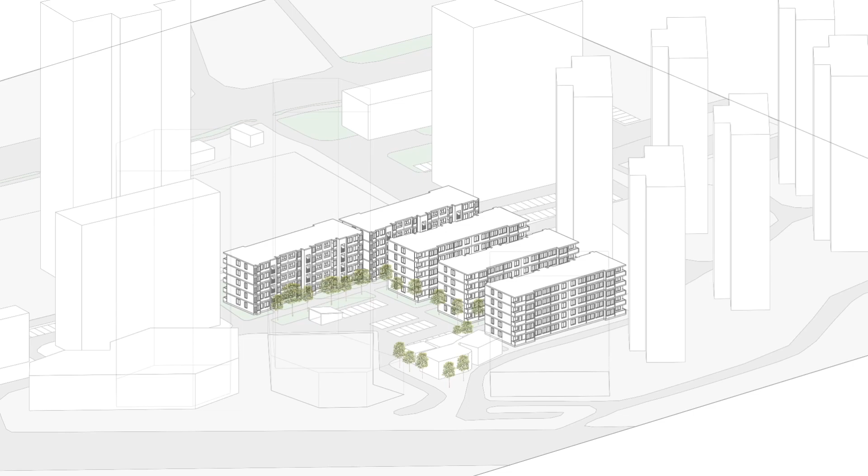This is a former colleagues community in Wuhan, China. Built as national property in the 1990s, it's been through the national privatizing housing reform, and the demographics have changed over time. The building blocks sit very close, and there is not much communal space.

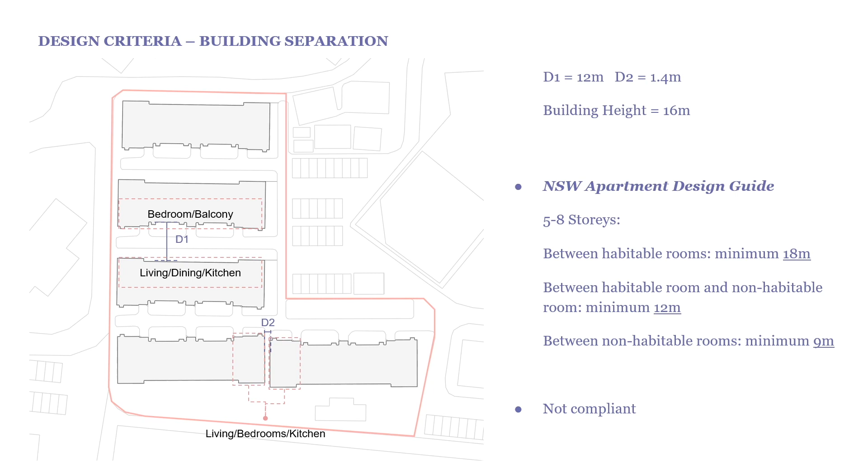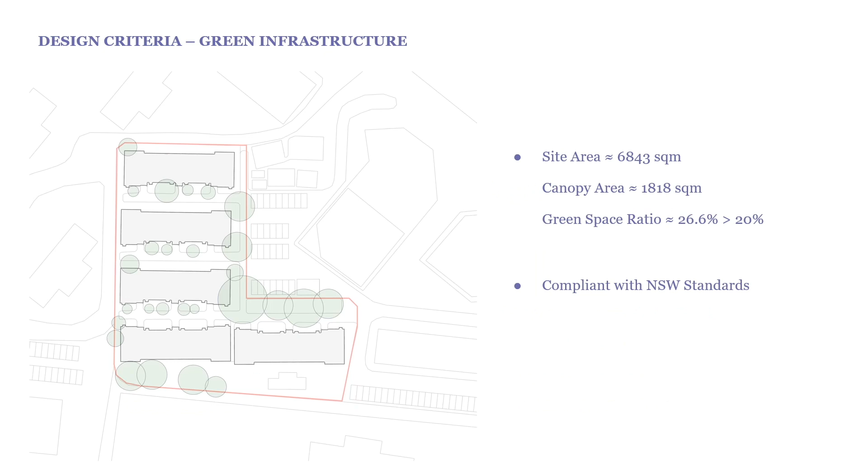It does not comply with either the New South Wales or Wuhan standards for building separation, especially for the two blocks sitting next to each other horizontally. For the green infrastructure and communal spaces, only the tree canopy target in New South Wales standards is reached.

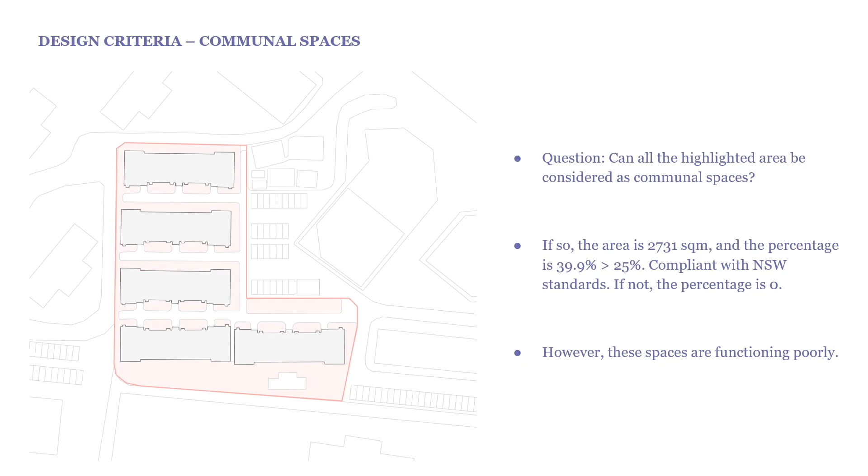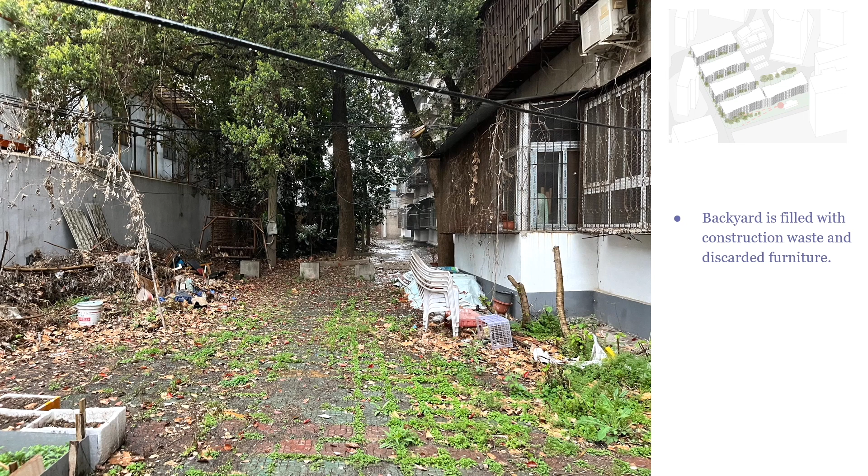Although the potential communal space is abundant, there are almost no facilities. Plus, the spaces are scattered around. They're functioning poorly as communal spaces. The backyard is filled with construction waste and discarded furniture. However, some residents have set up some small private farms and gardens.

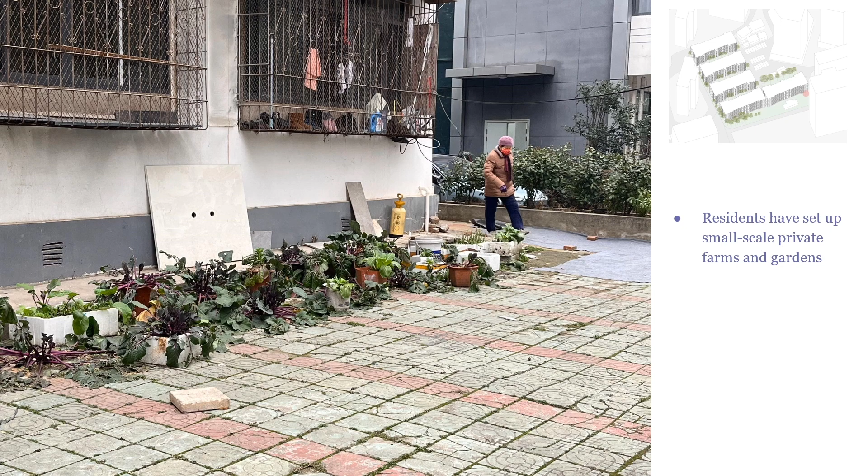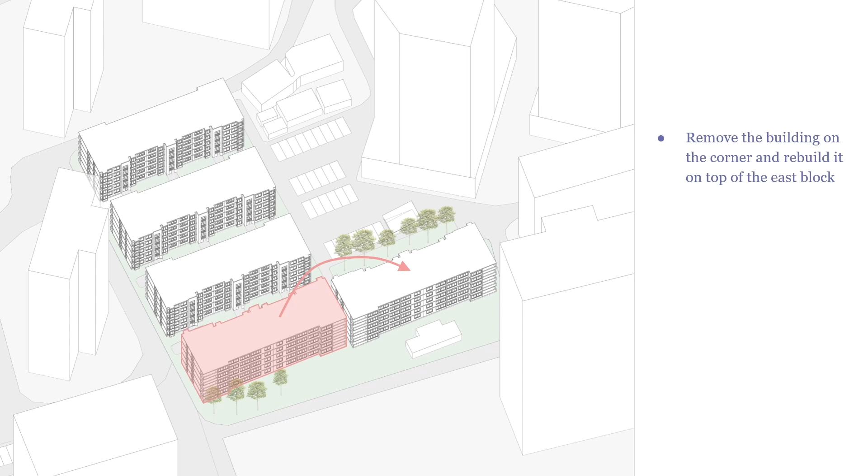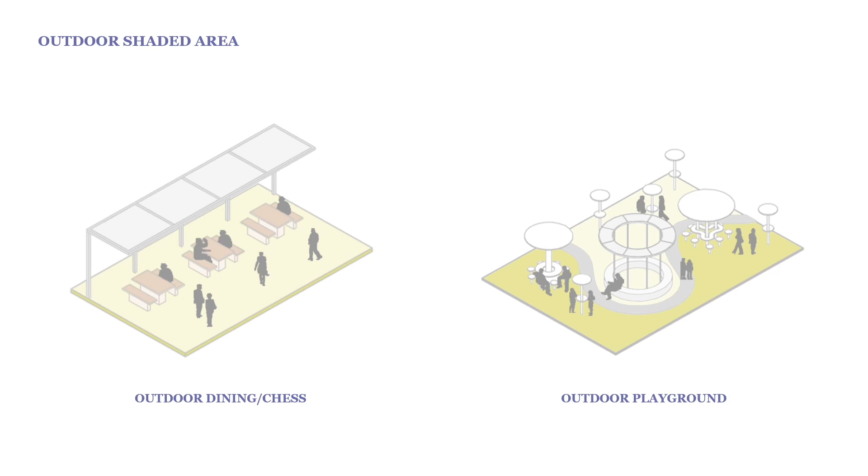In terms of the intervention, to incorporate the considerations above, the idea is to remove and rebuild the corner block on top of the east block. So there will be room for a central gathering communal space where various facilities can be introduced and shared.

With good communication with the residents beforehand, this method may be used for slab blocks or walk-ups to deal with high density and lack of ground floor communal spaces at the same time.

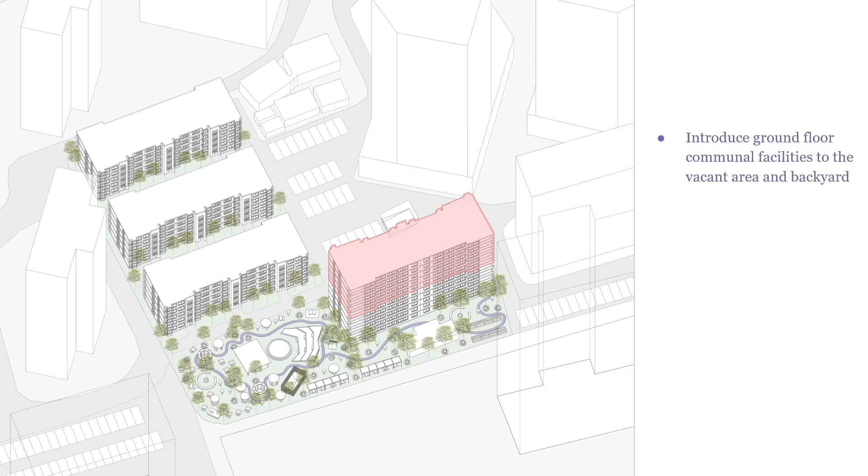The teachers' apartment tower was built in 1995, located in the Qiushi community in the central plot of Hangzhou City. Qiushi community was designed by Zhejiang University for the accommodation of teachers, staff, and their families. Qiushi community is a typical, highly aging community.

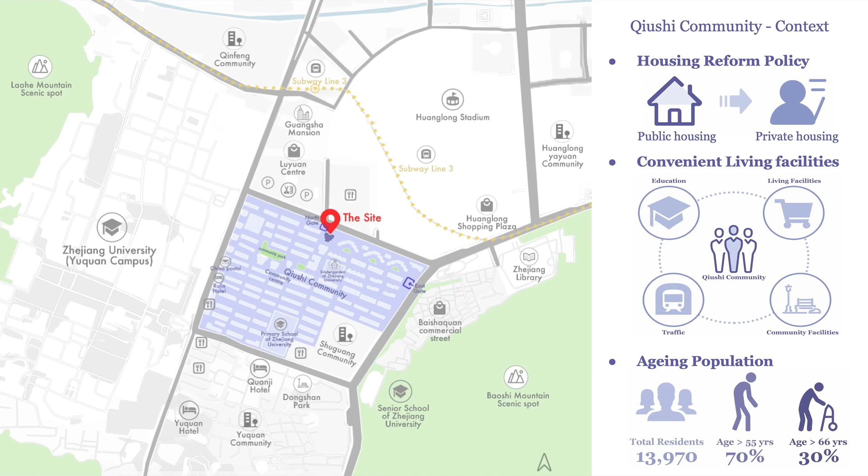There are many retired teachers and professors living in the community. Currently, there are many elderly living alone or living with their families. The typical floor plan shows each story has 8 flats, mainly 2-bedroom apartments.

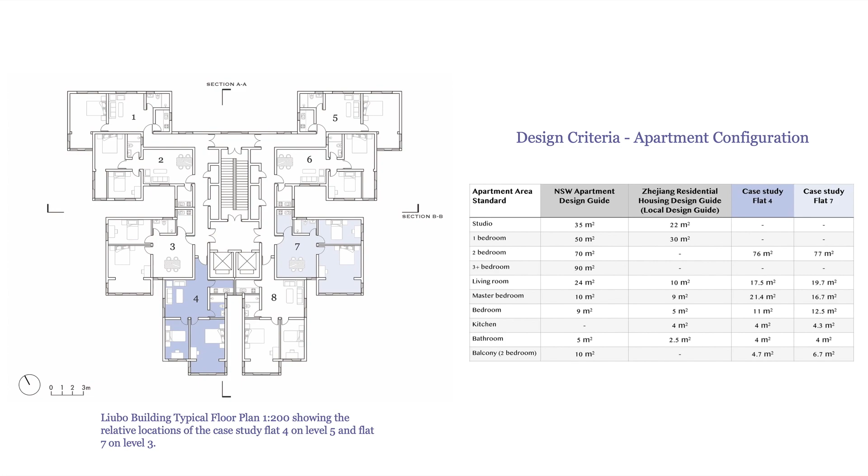The case study plan shows too many closed spaces, which reduce accessibility, and no total freedom of movement, such as a narrow kitchen, a washing machine installed in the bathroom, and a study desk and cabinet placed too close to the bed. There is no private open space. Residents have to dry clothes and grow plants outside the window.

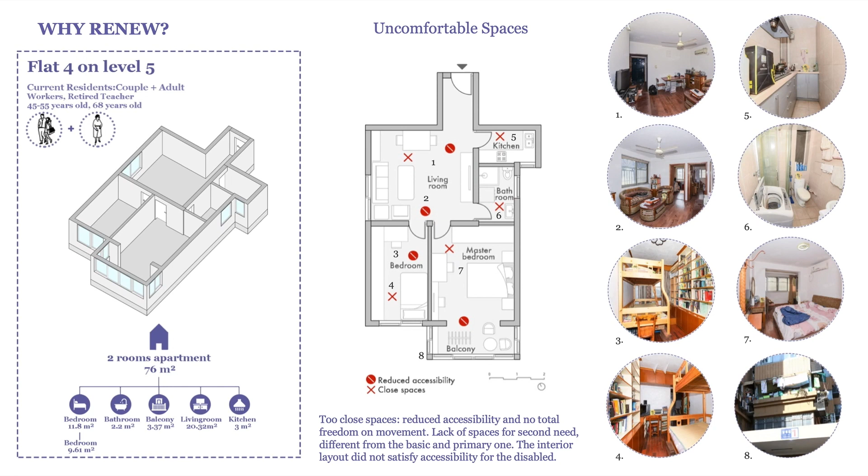The interior layout did not satisfy the current needs, and also lacks spaces for secondary needs. The Zhejiang Guide outlines the daylight factor requirements for specific rooms. The case study did not comply with the standards. The existing flat has poor daylight conditions and no external sun shading device.

The New South Wales and Zhejiang Guides both require that all habitable rooms allow natural ventilation. The New South Wales Guide specifies design criteria for cross ventilation, which the local guide didn't cover. The current apartment did not comply with the New South Wales Guide, with all rooms having single openings and no cross ventilation.

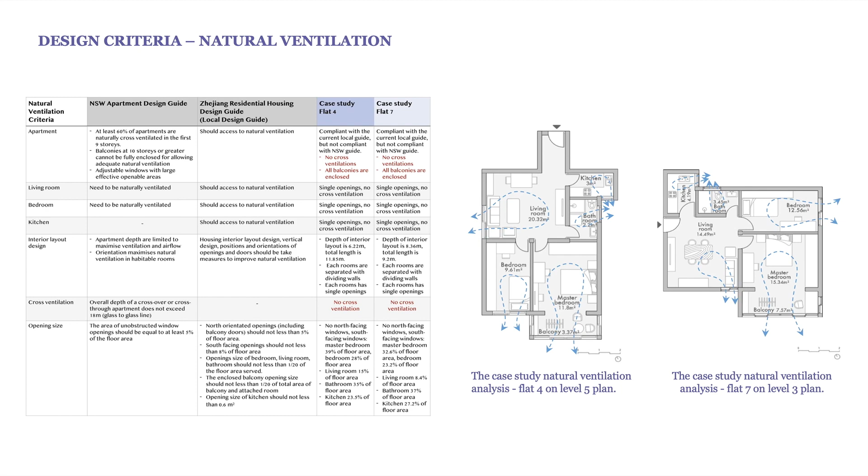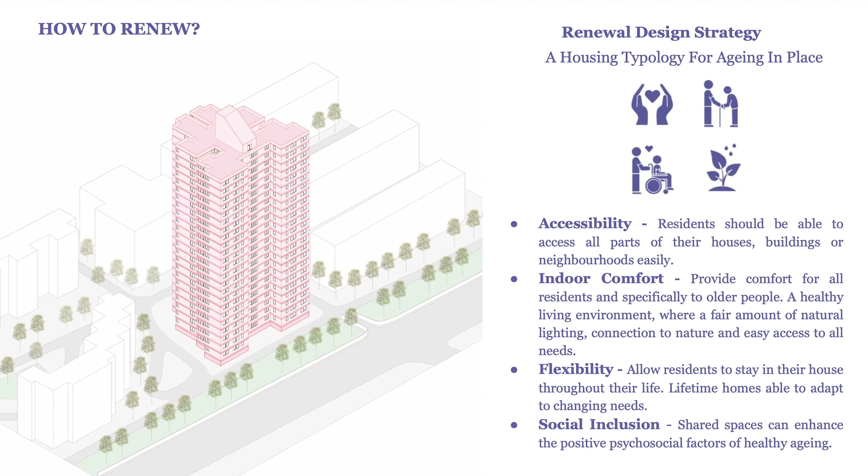The renewal design strategy addresses accessibility, indoor comfort, flexibility, and social inclusion. The renewal interior layout design is based on circulation access. Bedrooms are separated from the living area with a folding wall. At daytime, it can be fully opened, allowing cross ventilation and providing higher accessibility, especially for elderly and disabled people.

Bathroom and kitchen are separated by the corridor with a sliding wall for saving door space and allowing for cross ventilation. For flexibility, the walls became systems of furniture of different typologies based on different needs.

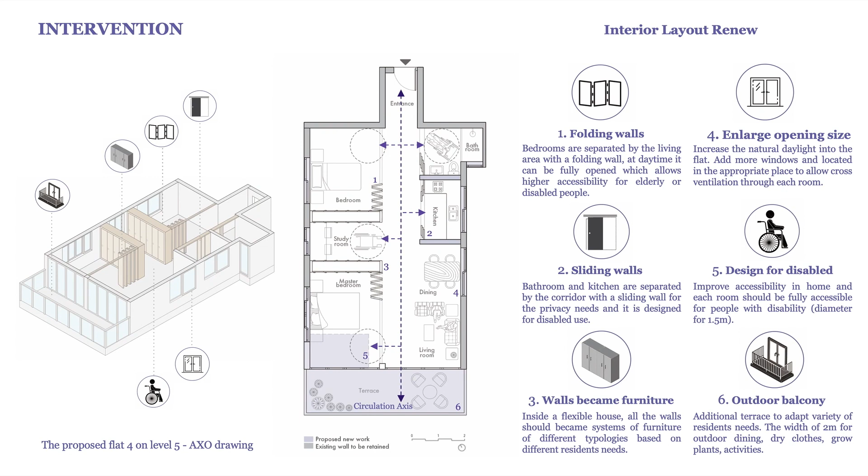Enlarge opening size to improve daylight and natural ventilation. Additional terrace for residents' needs such as outdoor dining, drying clothes, and growing plants. At each story, adding a shared space to enhance the social interaction between neighbors.

Additional lifts to improve the vertical accessibility. The aim is to create a better and healthier indoor environment for living for all ages.

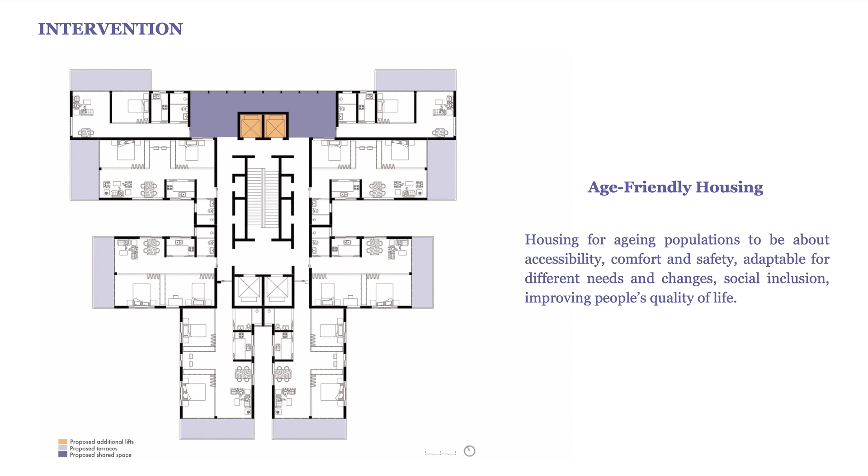The third case study is the Alwi Bin Sumayt House in Shibam, Yemen. This is a walk-up residential building in an Islamic community. It's a World Heritage building due to its location in the 1,700-year-old town of Shibam. All buildings in Shibam are considered World Heritage for their unique ancient mud brick high-rise buildings.

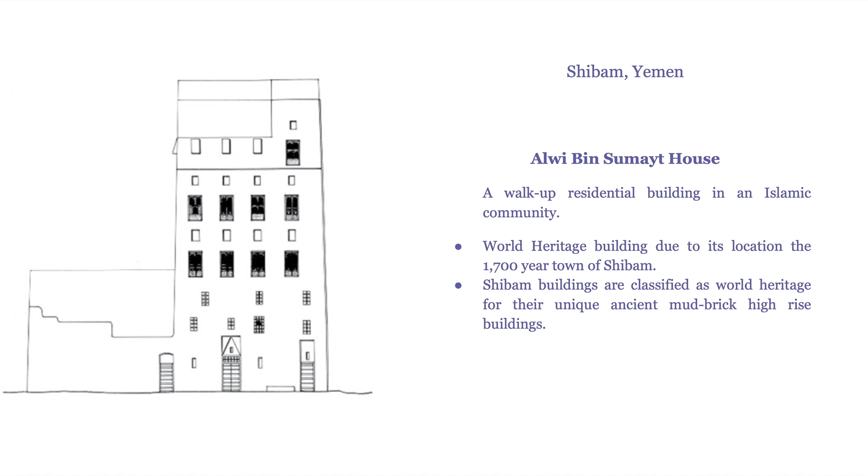And these are some of the key things that have influenced the guidelines that dictate how the architecture and the housing is carried out within both these communities, with Shibam producing the local design guidelines and Australia producing the New South Wales apartment design guidelines.

The context in which the Alwi Bin Sumayt house stands was looked at in comparison to the New South Wales apartment design guidelines. And from this it was seen that the community of Shibam is densely packed to maximize space. But according to the New South Wales apartment design guidelines, buildings should be a minimum of 6 meters away from neighboring habitable buildings.

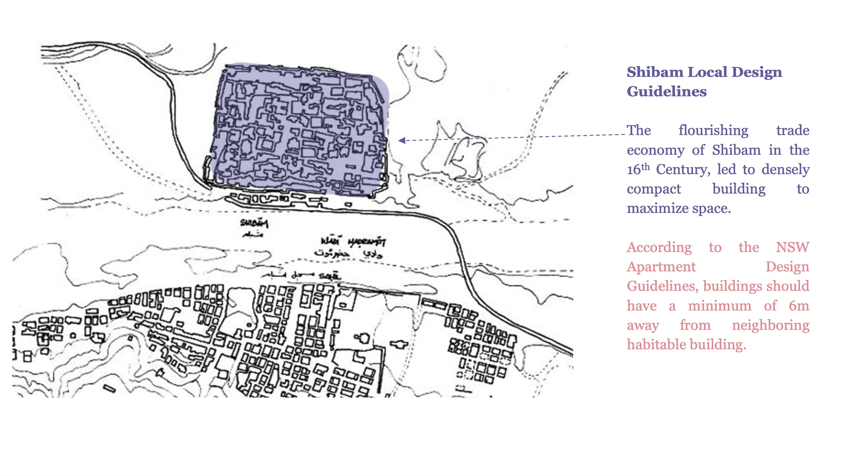In regards to thermal comfort, the local design guidelines utilize natural ventilation through the large operable windows that also produce adequate lighting. However, the New South Wales design guidelines ask that the building be oriented accordingly to maximize natural ventilation. This is impossible to do in the Alwi Bin Sumayt house, as it's already densely compact and cannot be oriented accordingly.

In addition, the room heights are 2.5 meters because the rooms have no furniture due to cultural traditions, and this is because most activities are done while seated, such as cooking and celebration. However, according to the New South Wales apartment design guidelines, habitable building heights should be 2.7 meters.

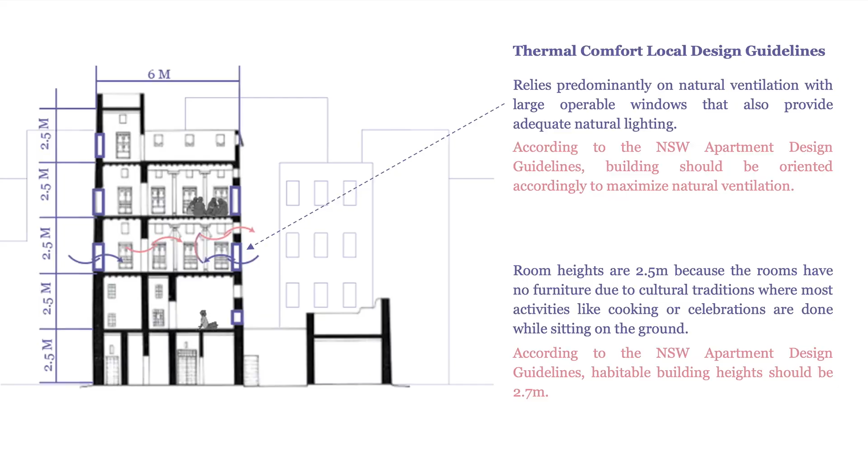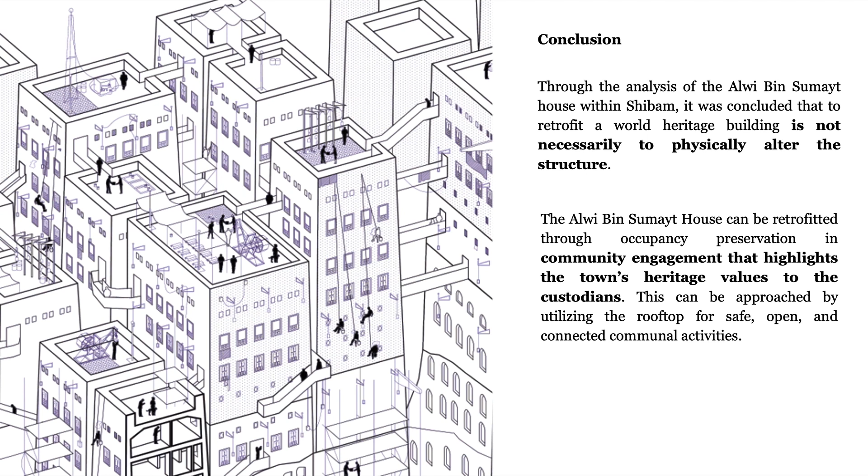In conclusion, through the analysis of the Alwi Bin Sumayt house within Shibam, it was concluded that retrofitting a World Heritage building does not necessarily mean to physically alter the structure. This can be retrofitted through occupancy preservation and community engagement that highlights the town's heritage values to the custodians. And this can be done in the Alwi Bin Sumayt house through utilizing rooftops for safe, open, connected communal activities.

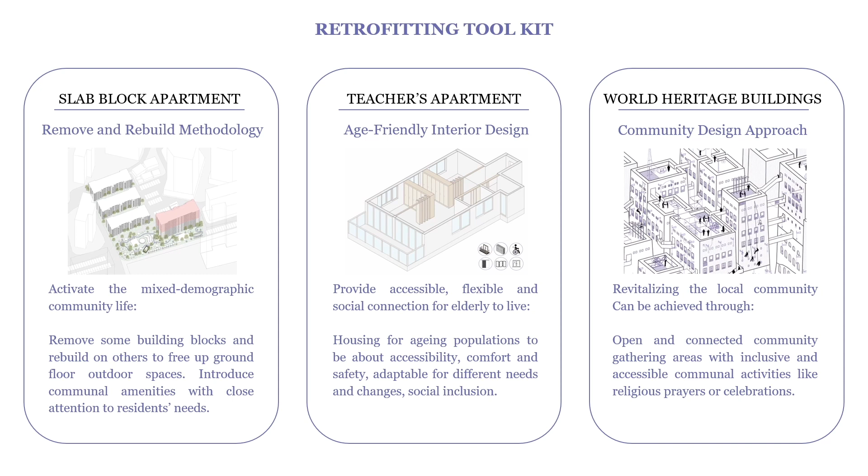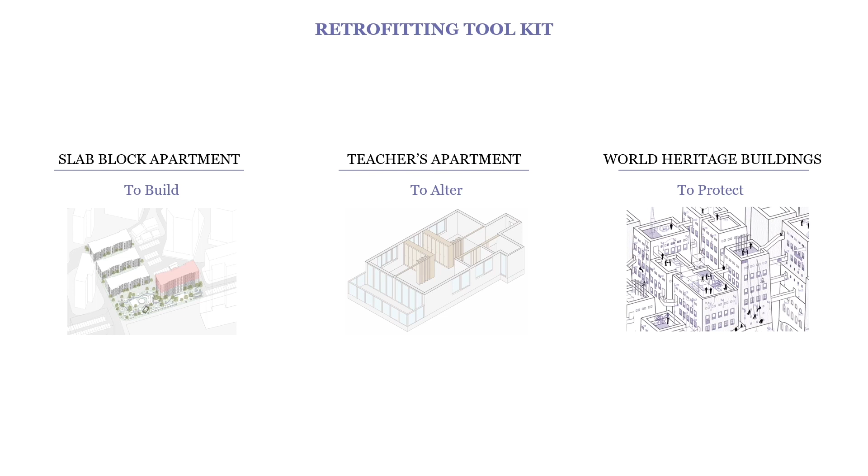For these 3 case studies, the toolkit ranges from removing and rebuilding forms, age-friendly interior redesign, to a community rooftop revitalizing approach, which does not include any structural changes. To build, to alter, and to protect. These seem to be very different ways of renovation, but they have one common methodology, which is renewing the environment according to people's lifestyle. That is, to make buildings adapt to people, and not the other way around.

Maybe renovation is not always about building or changing. Maybe it's more about the constant evaluation of whether the building can still adapt to people's lifestyle. Either to build or not to build, whichever way makes the building best adapt to people's life is the most sustainable way. Thank you for watching.